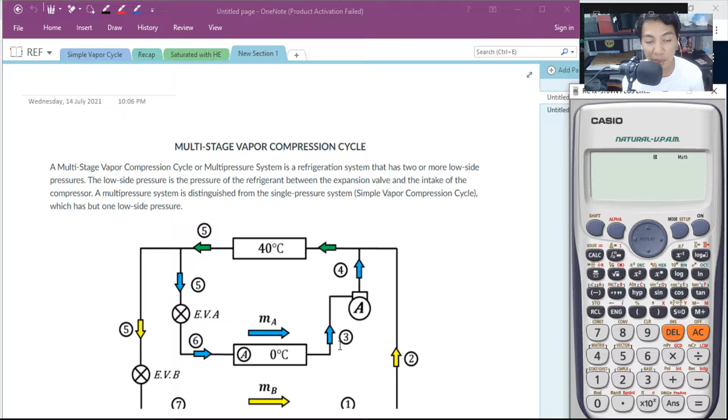So ano nga po ba yung multi-stage vapor compression cycle? By definition, it is also called a multi-pressure system kasi yung system mo magkakaroon ka ng maraming dyan, maraming compressor. May compression ka dyan, ilang beses ka magko-compress. So, dalawa compressor dito, depende sa system mo. Dalawa din ang evaporator mo. Kaya lang, iisa lang yung lalabasan nilang condenser.

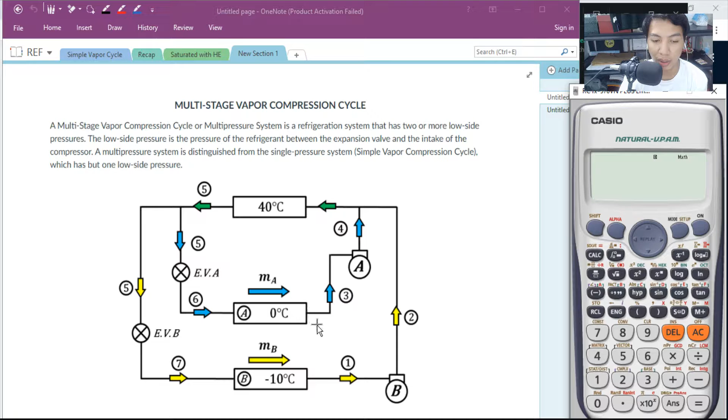So, it has two or more low side pressures. Low side pressures will be yung nandito sa iyong evaporators. Yan, low side pressure ang tawag dyan. Okay? And then, ang high side pressure mo, yung nag-build up dito sa 40. Anyway, ang hahabulin ng dalawa mong compressor dyan will be the pressure that is required here sa 40, or dito sa iyong condenser.

Now, the low side pressure is the pressure of the refrigerant between the expansion valves. Ilang expansion valves yan? Dalawa. And the intake of the compressor. So, a multi-pressure system is distinguished from the single pressure system, or yung simple vapor compression cycle but which has one low side pressure.

Pareho lang sila. Pero, dito, nagkaroon tayo ng multiple pressure na pagmumulan niya bago mo ipasok ng condenser. As you can see in the diagram, you only have one condenser and two evaporators, where those two evaporators will require and need two separate compressors in order for them to match up with the pressure that is required doon sa iyong condenser. And then, as you can see, dalawa din yung expansion valve mo. Dalawang throttling process ang mangyayari going separately coming from your condenser separately going to your two separate evaporators of different temperatures.

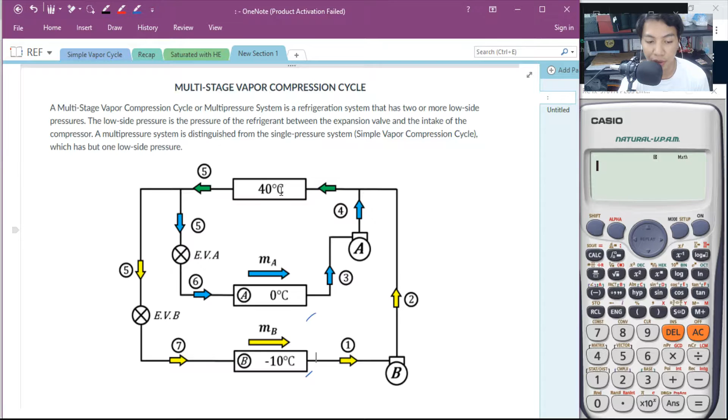So, pag-usapan natin yung pH diagram. Babasihan nyo ito, okay? The ultimate pressure or the maximum pressure is the pressure na nandun sa iyong condenser. And this one is the pressure of evaporator at 0 degrees Celsius. Ito naman yung pressure at evaporator at -10.

Ngayon, tignan nyo hindi sila magkakonekta. So, dito will be your point 1. Your point 1 will always come from the lowest temperature and lowest pressure evaporator. So, this is point 1. Going to point 2, ibig sabihin this is S is equal to C.

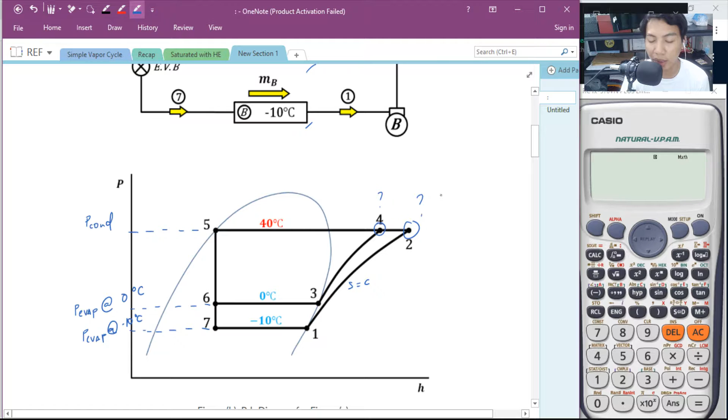How will you find H2? How will you find H4? Mamaya, pag-usapan natin yan. So, hindi mo masasolve muna ito. Hindi mo masasolve ito. But, we can see that H4 and H2 are superheated vapors. Okay? And then going 3 to 4, ganun din, S is equal to C.

Yung H1 mo is Hg at temperature mo is equal to -10 degrees Celsius. O, kuha mo yan. Yung 3 din is Hg at T is equal to 0 degrees Celsius. Ngayon, itong temperature na to, dito. Yung temperature na to, dito. This is T1, this is T3. Ngayon, ito, hindi mo masasabing temperature din yan nung P-condenser kasi nga superheated vapor sila.

So, how will you determine? At tulad din yung pag-determine natin ng simple vapor compression cycle ng H2 and H4. All you have to do is to determine yung SG dito and SG dito. Yung SG dito, pag na-determine mo na, i-connect mo sila doon sa pressure na tatamaan nila, which is pressure of the condenser. Now, after going back, we can see that H4 is less than H2.

Oh, ngayon, masasolve mo si H2 using this SG ni 1 kasi doon siya nakakonekta sa isentropic line and then you will trace it using yung condensing pressure. Now, ganun din yun sa H4. H4, you will trace the SG ni 3 and then trace the pressure of the condenser. Okay? Pressure of the condenser.

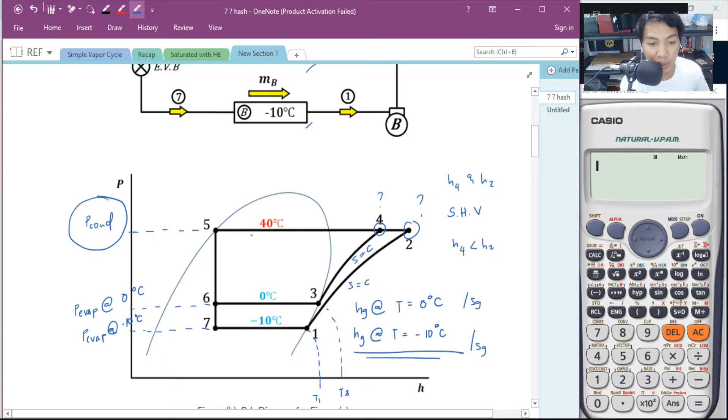And then, going back, makita nyo dito ulit sa iyong block diagram, yung 5 to 6 and 5 to 7. Ibig sabihin, yung lumabas dito, yung H5, that is saturated liquid na. Dito, mga superheated vapor, dito saturated vapor.

Pareho sila ni 3 and 1. And then ito, saturated vapor din dito. Ito pare-parehas. Tandaan nyo, this is H5 is equal to H6 is equal to H7. Ano po ba yan? Tumapak si 5 sa saturated liquid. Ibig sabihin that is HF at P ni condenser.

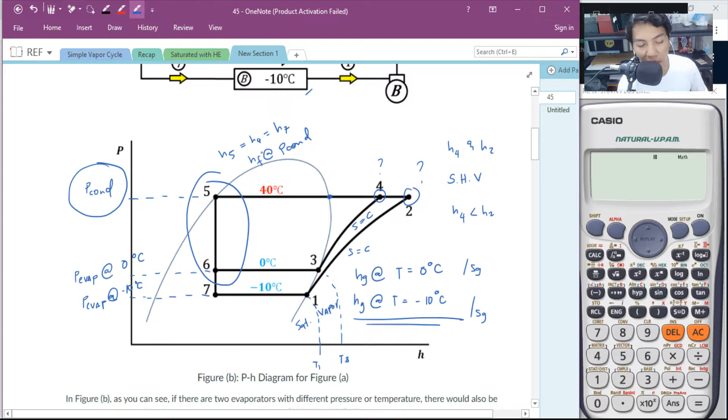Now let us determine. In figure B, as you can see, if there are two evaporators of different pressure or temperature, there would also be two constant temperature lines. But that does not mean that your 4 and 2 will be the same temperature. But we can see what's there.

Now there would also be two constant temperature lines of the evaporator in the diagram. The two expansion valves represent points 5, 6, and 7 on the pH diagram, while the two compressors in the cycle represent two isentropic curve lines. Right? I said it was shorter earlier.

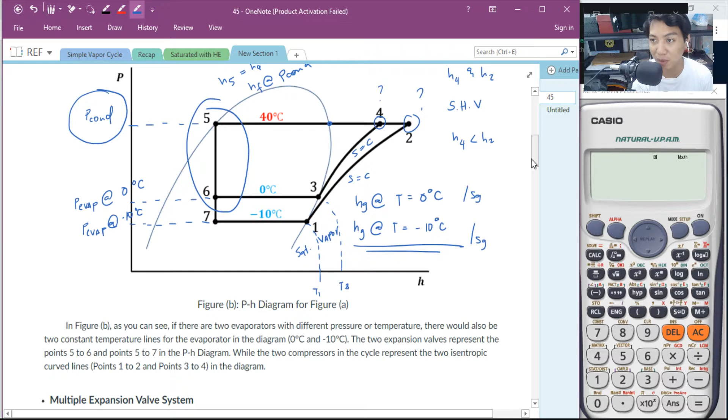Now we go to the multiple expansion valve system. The expansion valve is designed to lower the pressure of the condenser, but for me, that is a throttling process, constant enthalpy, from condenser pressure to the pressure of the evaporator.

Now, a specific expansion valve is designed only for these pressure limits. They cannot exceed them. If there are multiple evaporators with different temperatures, take note, this is where multiple expansion valves are needed. Different temperature evaporators.

Okay, this is the note there. There are multiple evaporators of different temperatures, so you will have multiple expansion valves. You can't just use a single valve.

This is the enthalpy leaving to the condenser. Now, the enthalpy entering the two expansion valves are the same. Although the enthalpy is the same, the mass of the refrigerant cannot be the same. There will still be mass balancing that happens.

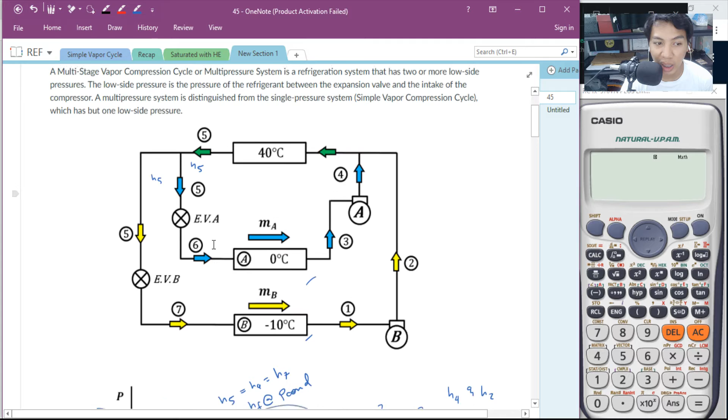Look at our diagram, it branched out. You have a mass here. Let's say here, mass of the condenser, or mass of 4. It comes out here as M5, then it enters here, already split.

It depends on the conditions given to you. Of those masses, it is not equal. Mass 6 and mass 7 are not equal, and that is also not equal to 5. But their total is 5.

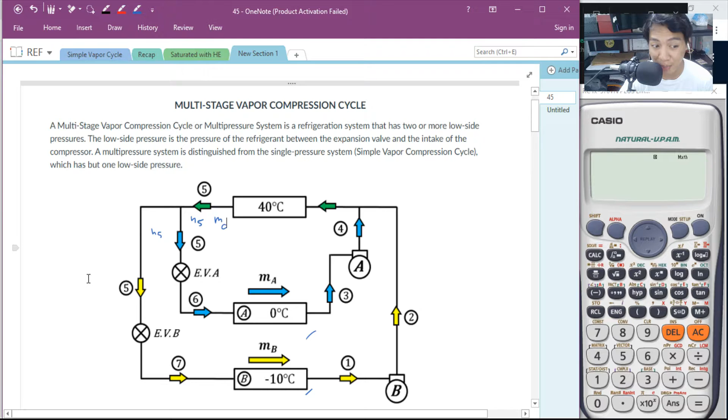Now, from the figure, you can see that there are two evaporators, evaporator A and evaporator B, with different temperatures. Evaporator A has 0 degrees Celsius, while evaporator B has negative 10 degrees Celsius.

Since there are two evaporators, the system will also require two expansion valves. As I said, it can't just be one. So expansion valve A and expansion valve B.

Those expansion valves will be for the pressure reduction from the condenser. They remove the high pressure from the condenser down to the pressure line of A, while E.V.B is for evaporator B, for the pressure reduction of the condenser line down to evaporator B, which has a different temperature.

Again, if there are a number of evaporators with different temperatures, you will also require a number of expansion valves. It can't be just one expansion valve, because the pressures they're chasing are different, at different temperatures.

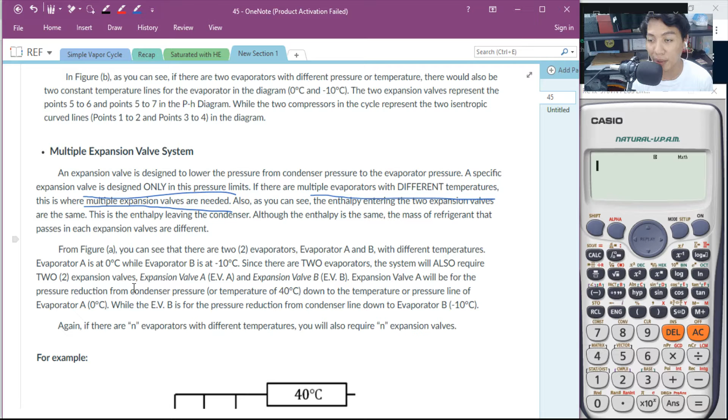Now, this is a good example. You have one condenser, three evaporators. So you also have three expansion valves. Okay, sample B, this one.

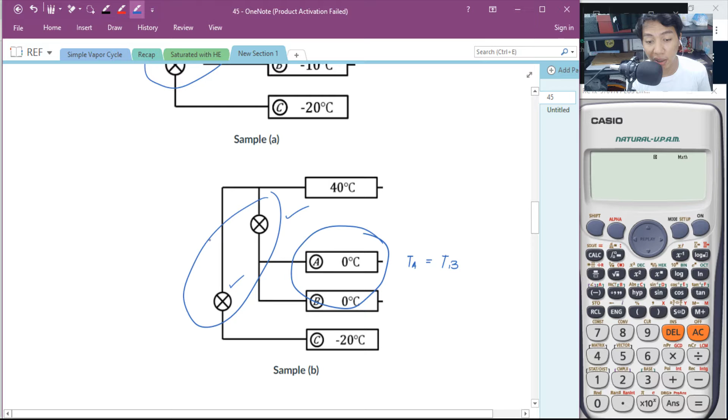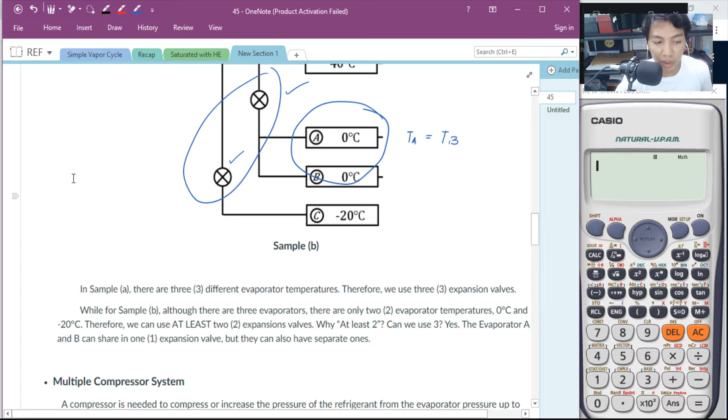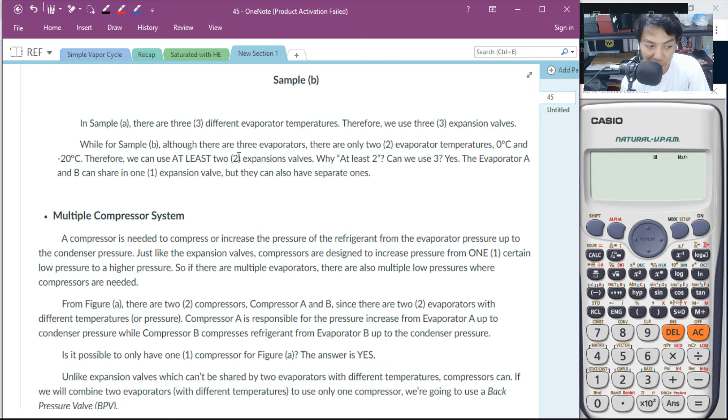A compressor is needed to compress or increase the pressure of the refrigerant from the evaporator pressure up to the condenser pressure. Just like the expansion valves, compressors are designed to increase pressure from one certain low pressure side to a higher pressure. So if there are multiple evaporators, you'll likely have multiple low pressures and then multiple compressors to raise it up to the pressure requirement of the condenser. So, from figure A, we have this down here.

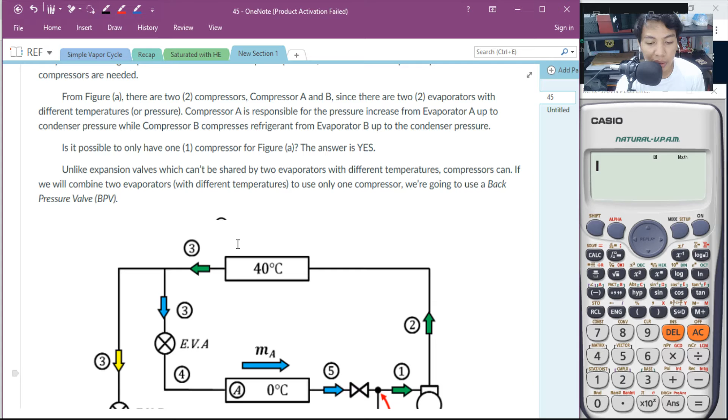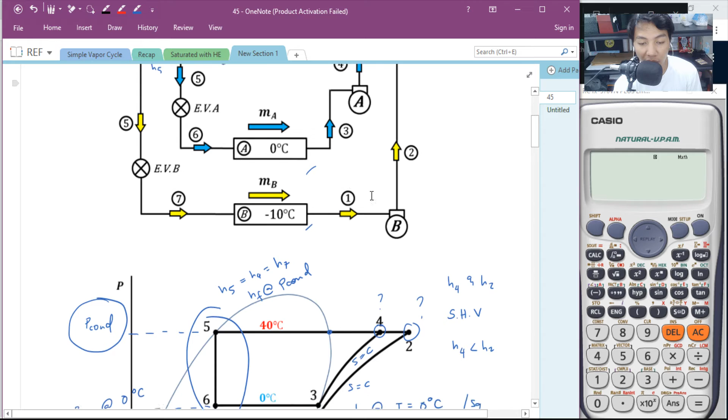There are two compressors, compressor A and B, since there are two evaporators with different temperatures. Compressor A is responsible for the pressure increase from evaporator A to the condenser, raising the pressure from the low pressure side at evaporator A to the condenser. And the same for B, it raises the pressure to match what we're giving here at the condenser, coming from the low evaporating pressure.

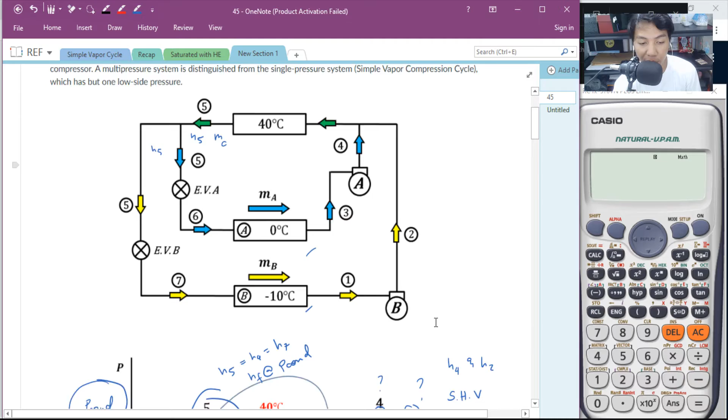Ay, yun lang yung paliwanag doon. Is it possible to only have one compressor for figure A? Yes. Unlike expansion valves, which can't be shared by two evaporators, pwede daw yun. Pwede.

Ayan, ito na ang tanong ha. Pwede po ba isa lang compressor? Yes, pwede, mag-iiba lang yung graph mo. Mag-iiba yung pH diagram mo. Unlike expansion valves, it can't be shared by two evaporators with different temperatures. Compressors can. If we will combine two evaporators at different temperatures to use only one compressor, we're going to use

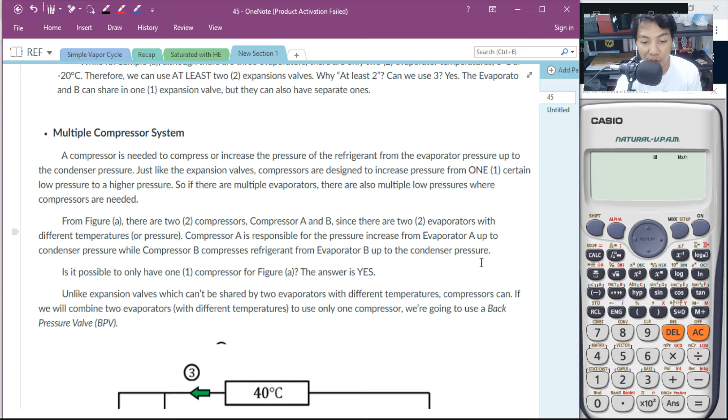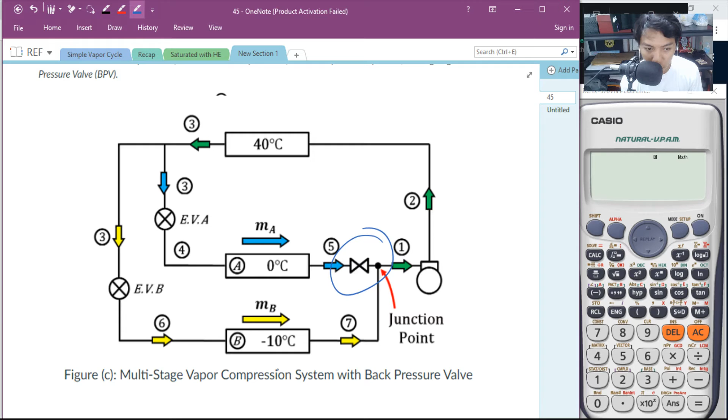back pressure valve para mag-match up yung pressure niya. Kaya nagkaroon ka ng back pressure valve. Ano po bang ginagawa ng back pressure valve? From the word itself, back pressure. Di ba magkaibang pressure yan? Ngayon, yung pressure at A, it will go sa back pressure valve para hindi bumalik yan. Back pressure valve, ano ba meaning ng back pressure valve?

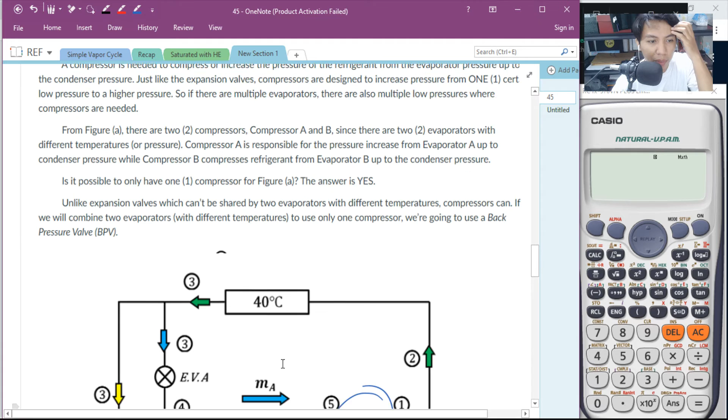The back pressure valve has the same working principle as the expansion valve, for pressure reduction, while the enthalpy of the refrigerant is held constant. The evaporator with higher pressure compared to the other will use back pressure. Its pressure lowers until it reaches the pressure line of the other evaporator. Ima-match up niya yung pressure bago sila mag-mix up dito. Hindi mo pwedeng pag-mix up yung dalawang pressure at magkaibang temperature.

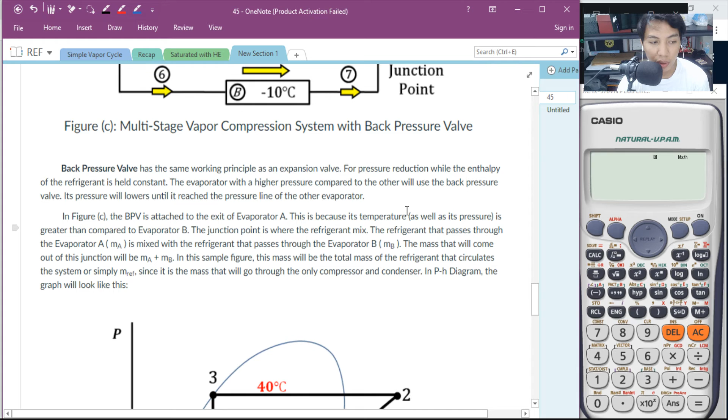Okay? Yung back pressure valve dyan, in figure C, dito, is attached to the exit of the evaporator A. This is because its temperature as well as its pressure is greater than compared to the pressure of the evaporator B.

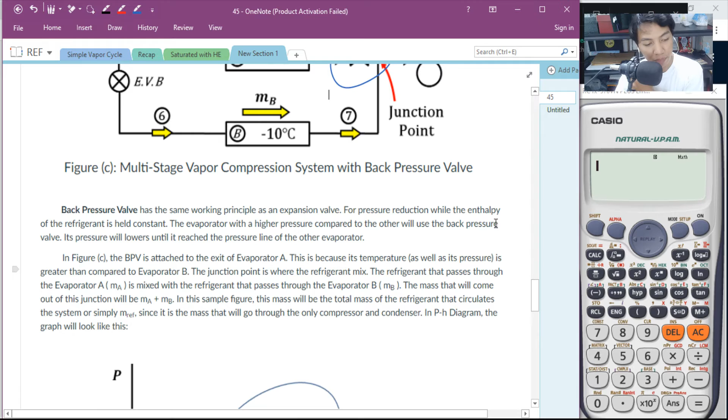The junction point is where the refrigerant will mix, so ganun din yung kanilang mass. The refrigerant that passes through evaporator A, MA, is mixed with the refrigerant that passes through evaporator B, which has a mass of MB. The mass that will come out of this junction will be the total mass, MA plus MB. In this sample figure, the mass will be the total mass of the refrigerant that recirculates through the system, or simply called the mass of the refrigerant, MREF, since it is the mass that will go through your only compressor and condenser. In the pH diagram, it will look like this.

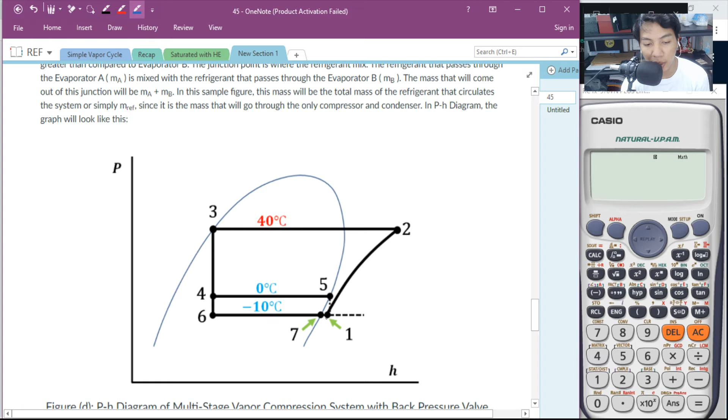So, meron kang mixing dyan. If this is the point 7 from your evaporator, this is 1. Okay? Nasaan ang 1 mo dyan? That is now the part where it will go to your compressor. So, yung pressure ba ni 5 will be equal to 1? Not necessarily, kasi magmimix sila at 1 point kung saan it will go to your compressor.

Kaya nga may back pressure, babalik yung pressure niya pababa. Okay? Yung pressure niya higher than dito. Itong pressure nito will be higher than this pressure. So, pressure at 0 degrees Celsius, dito yung pressure at negative 10 degrees Celsius. Back pressure, babalik sa back pressure. Okay?

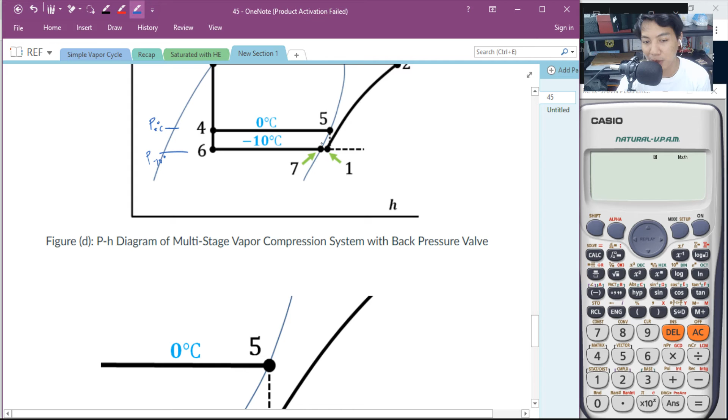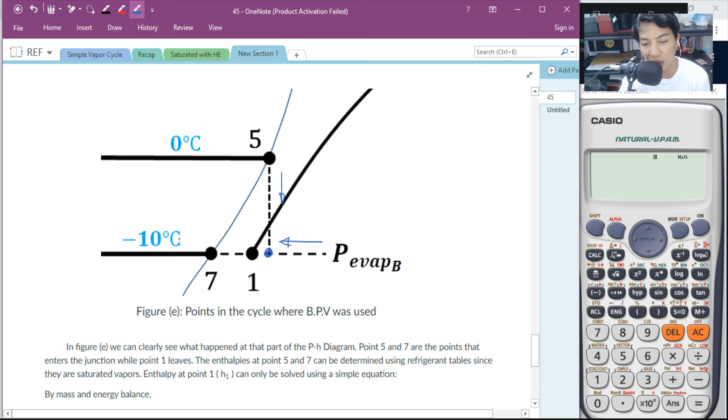Dito bababa yung pressure niya, and then it will go back to the pressure ng evaporator dito sa lower pressure side. Okay? In figure E, we can clearly see what happened at that part of the P-h diagram. Point 5 and 7 are the points that enter the junction while point 1 leaves. The enthalpies at point 5 and 7 can be determined using a refrigerant table since they are saturated vapors. And we can see that H5 is greater than H1, and H1 is greater than H7.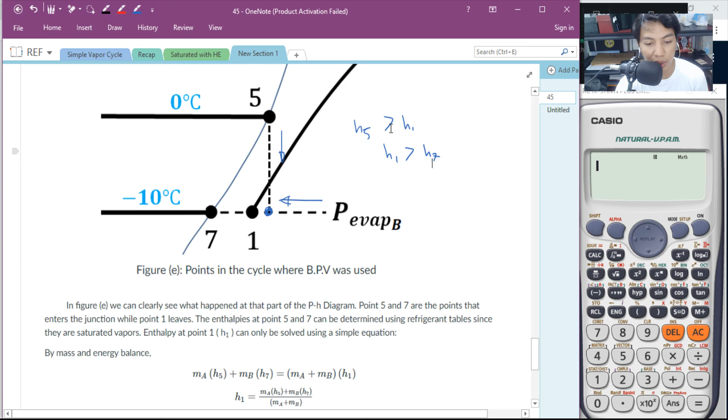The enthalpy at point 1 can only be solved using a simple equation. Mag-aano ka, energy balance ka. Okay, tignan mo dito, dito tayo nag-meet. So, itong H5 is HG at T, where T is equal to 0 degrees Celsius. Si H7 is HG at T, where T is equal to negative 10 degrees Celsius. So, H1 is, ito na yung simple equation, by mass balance and energy balance.

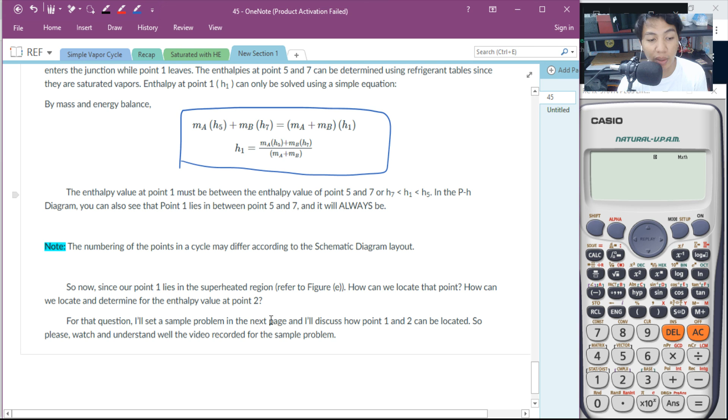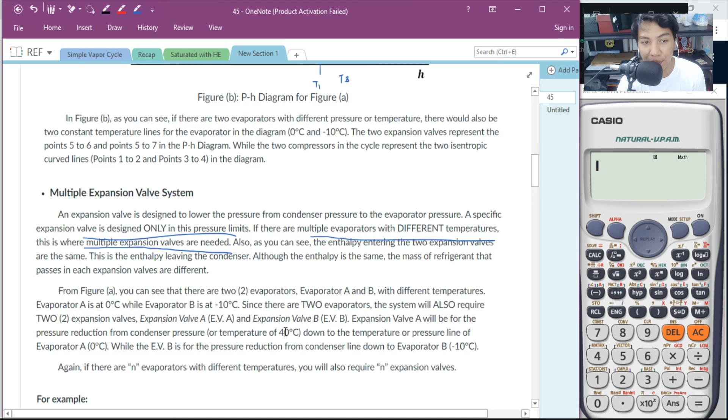Now, note that the numbering of the points in a cycle may differ according to schematic diagram layout. Depende yan sa schematic diagram. So now, since our point 1 lies in the superheated region, how can we locate it? How can we determine the value of enthalpy at point 2? For that question, mas magandang dun tayo sa sample problem natin. Okay? So, let us solve a problem para maintindihan natin to, on our next recording. So, the notes will come out after this, for questions, after this recording.